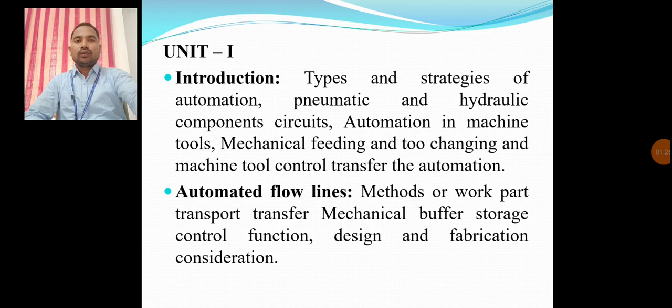We will move to Module 1, which belongs to production system. Before going to discuss automation, first we concentrate on production system. What is meant by production system? Production system is nothing but a collection of people, equipment and procedure organized to perform the manufacturing operations of the company. That's considered as a production system.

In this production system, one view should be considered as facilities and another view should be considered as manufacturing support system. The facilities of production system consist of the factory equipment organized in that particular industry. So facilities should be considered as only factory equipment. In factory facilities we need equipment, we have to require labor, and to utilize the transferring systems. All these things we need as facilities.

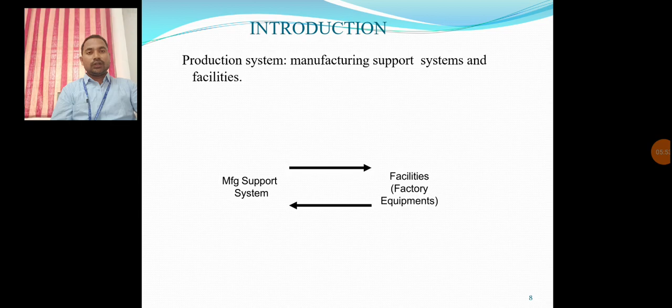Next, these are the flowchart of manufacturing support system. In this flowchart, we are considering four categories, which we have to involve in a production facility system. That production facility system belongs to the company organization and company equipment. In this, four departments should be acting: product design, manufacturing planning, manufacturing control, and business function as the fourth one.

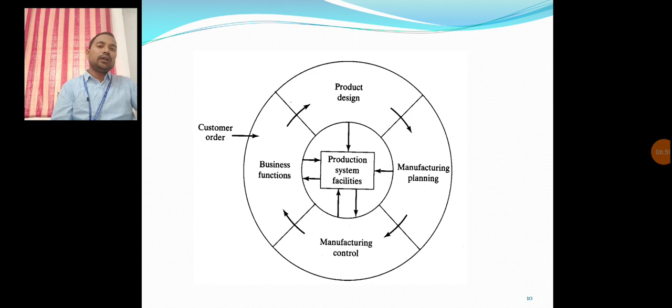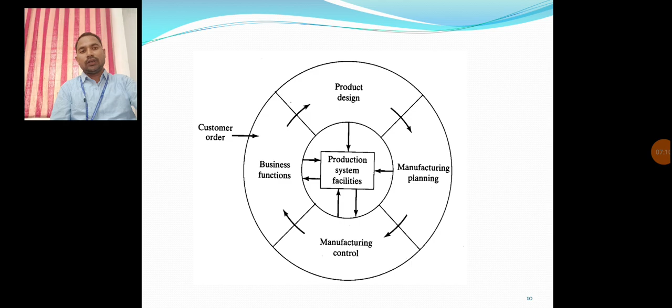In these four activities, initially the customer order will be taken based on the requirement, customer order requirement, taking orders from the customer, and applying the four categories. Finally, based on customer order, we have to satisfy and deliver the component to the customer. This is indication for exactly the manufacturing support system.

After completion of that particular design, we transfer into the manufacturing planning department. There, we consider how much cost should be required, estimation of the cost, and how to finalize the MRP for that particular product. All these things we consider as the manufacturing planning department.

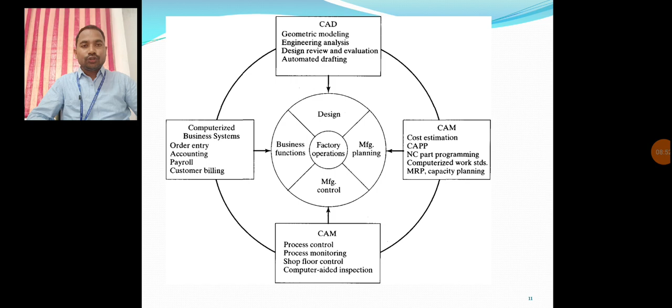After that, it will be transferred into the manufacturing control system. There, a number of workstations should be considered. Each workstation has a number of operations going on. To control all the workstations, this department is considered, controlling that entire concept.

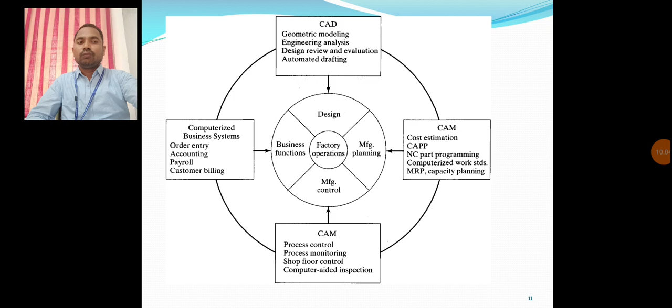This view should be considered related to this particular manufacturing control. After one, it will be transferred into the business functions. There should be considered the main role for that particular business function: it will take the order from the customer, and after finishing the goods or product, it will deliver to the customer based on quotation of the product, billing, accounting, and all these things coming into this business function. These are the manufacturing flow information that should be observed related to the production system.

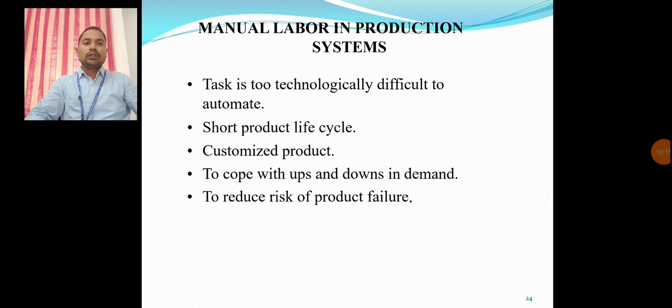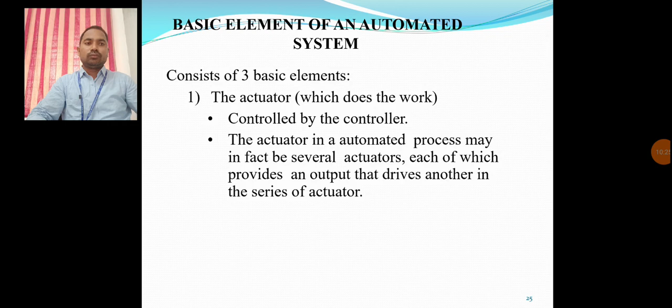Why are we considering manufacturing support in the present day? What is the main role for that particular automation? To increase the quality of the product, and to decrease labor cost and get the quality of the product. These are the main roles for using automation.

In this particular automation, some basic elements are needed to operate the equipment, whatever the automation may be. These may be considered as sensors, and different types of sensors are used in automation, and some are considered as actuators, and some ways we have material handling support systems. This material handling support system should be considered as a number of equipments, which may be powered or non-powered categories related to conveyors, cranes and hoists. All these things we consider related to automated guided vehicle systems. This completely, entirely depends on sensors and actuators.

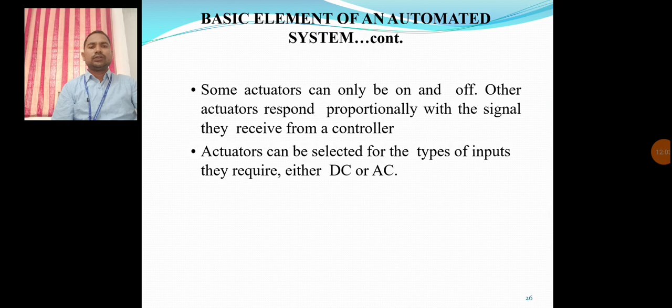Next I am going to discuss the types of automation. We have already discussed the main role for automation, why we are using it in present days: generally to increase the production cycle, to minimize the production cycle time, and to get quality of the product, meaning accuracy, and to minimize labor cost. That's the purpose for which automation is generally implemented nowadays.

Regarding that particular role, we have to consider three types: one is fixed automation, the second is programmable automation, the third is flexible automation. In fixed automation, sometimes called hard automation, the number of operations are fixed.

For example, we can take making internal threading on a hole. Initially we make the drill, after boring operation, next counter boring, counter sinking, and after that internal threading. These are the 5 operations to be considered. Each operation can be done at only one workstation now. In that situation, each operation at each workstation will be done, and those operations belong to a fixed sequence. That's considered fixed automation, sometimes called hard automation.

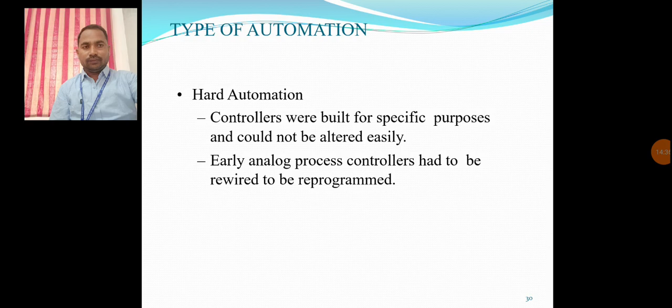Next we consider programmable automation, sometimes called soft automation. What is meant by programmable? Programmable automation is nothing but where the sequence of operations will change. Initially the sequence of operations here is fixed, but here those operations can change. We can do exactly after drill, directly go to internal threading. That concept is related to soft automation.

In programmable automation, the sequence of operations will change, and fewer operations need to be done. When we take fewer operations, the variety of product will increase, but the same quantity is not obtained in this programmable automation. These programmable automations are applicable for a batch production system, and a similar quantity can be done more here in this concept.

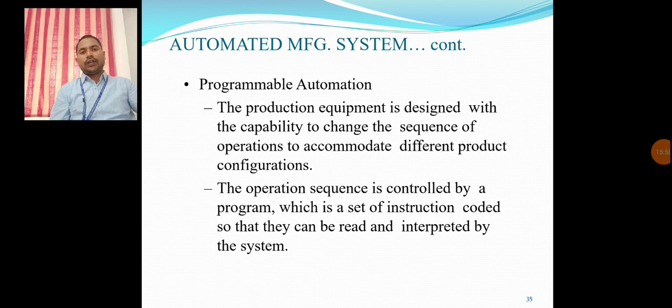Thank you. We'll discuss in the next module related to automation flow line. Thank you.